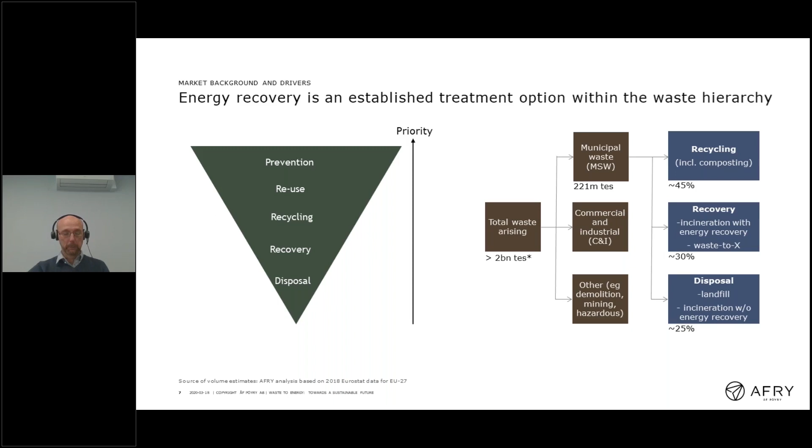A very quick overview of the key policy and legislation that drives waste. The top two directives are to do with what you do with waste and how you move it. And then the bottom two are about essentially how you burn it in waste to energy facilities or in incineration facilities.

So starting at the top left, the landfill directive has been very successful in reducing the amount of waste going to landfill. So the landfill directive is all about definition and regulation and operation of landfill in a safe manner, but it also sets targets for diversion of biodegradable municipal waste away from landfill. These were updated in 2018, and the latest target now is that by 2035, the amount of waste going to landfill should be only 10% of the level that it was in 1995. And that landfill diversion has been the big driver of the growth of waste to energy in Europe.

The Waste Framework Directive on the top right is the document that actually sets out the waste hierarchy we saw on the previous slide. It defines what is a waste, what isn't a waste, how waste should be moved, both within a country and across borders. It also sets recycling targets, and again, these have been updated recently. So the latest target is that by 2035, 65% of household waste should be recycled.

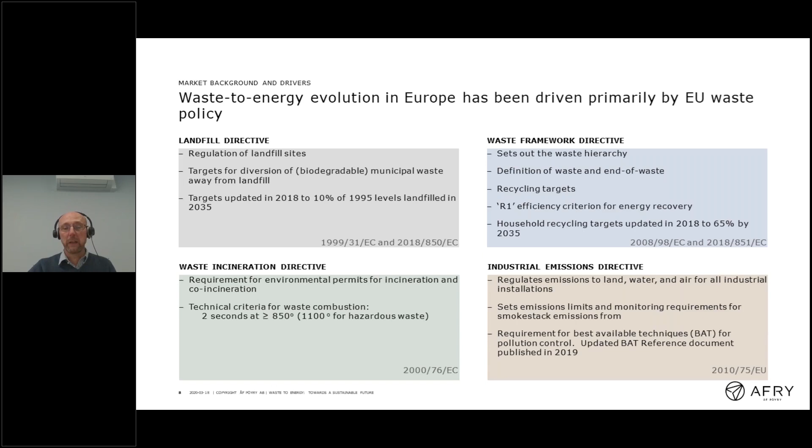Okay, so moving on, the chart on the left shows that although the total volume of municipal waste has remained broadly steady over the last 25 years, the landfill directive has in fact been very successful in diverting that waste away from landfill. And you can see that that diversion has resulted in significant increases in recycling, composting, and in incineration. And so, as I said, the landfill directive has really driven the growth of energy from waste across Europe.

And you can see that on the right-hand chart that shows the evolution of capacity over time. So now we've got over 150 million tonnes per year of waste to energy capacity. And it's worth noting that that figure is higher than the 90 to 100 million tonnes in the chart on the left, because most of these facilities burn a mixture of municipal waste and commercial and industrial waste.

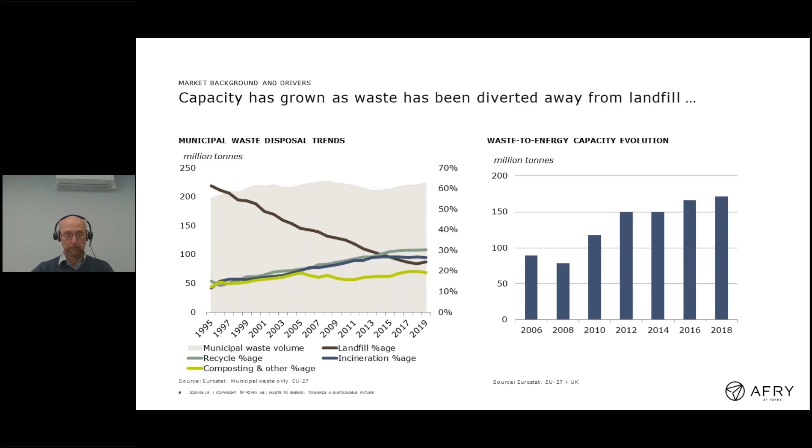But it's worth saying that although, looking at Europe as a whole, it's been a success story, it's certainly a mixed picture across different countries. So as I was saying, generally speaking, waste to energy has made most progress in Northwest Europe. In other parts of Europe, there's still significant amounts being sent to landfill, which shows that in those particular markets, there is potential for more build out.

In the more developed markets, rather than building many new facilities, I think the focus will be on refurbishing and replacing facilities as they age, and some of these facilities are getting quite old in some of these markets.

This is the same chart, but I've also added onto this recycling rates, just to make the point that generally speaking, high recycling and high waste to energy have tended to go hand in hand. As landfill volumes have been diverted away from landfill, that's generally led to more segregation of waste at source, which helps you recycle more, and then the residual waste stream can be sent to a waste to energy facility.

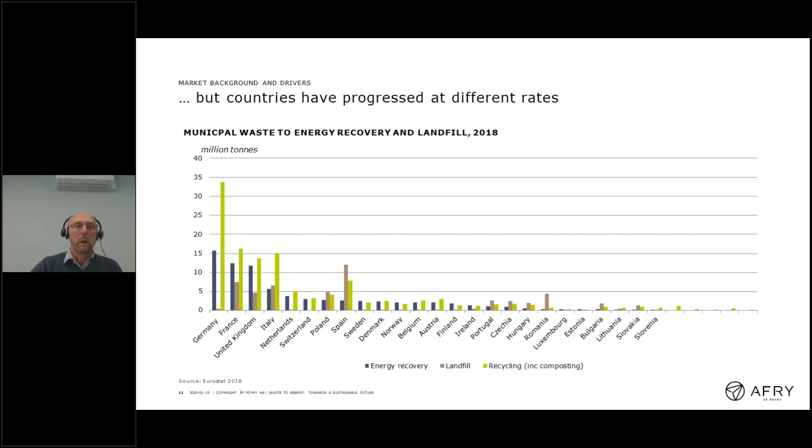but these are very capital intensive assets, and there's definitely a role for third party finance to come in and help get these facilities built. And from an investor point of view, they can be attractive investments. They tend to be long-term investments, and that suits a lot of the infrastructure fund, pension fund money that's looking for long-term investments. And generally speaking, a lot of these facilities are underpinned by long-term waste supply contracts with creditworthy public sector counterparties.

Having said that, there are still a lot of risks that need to be understood for investors looking at investing in waste to energy. In this chart, I've split those into three broad categories: feedstock, technology, and energy offtake.

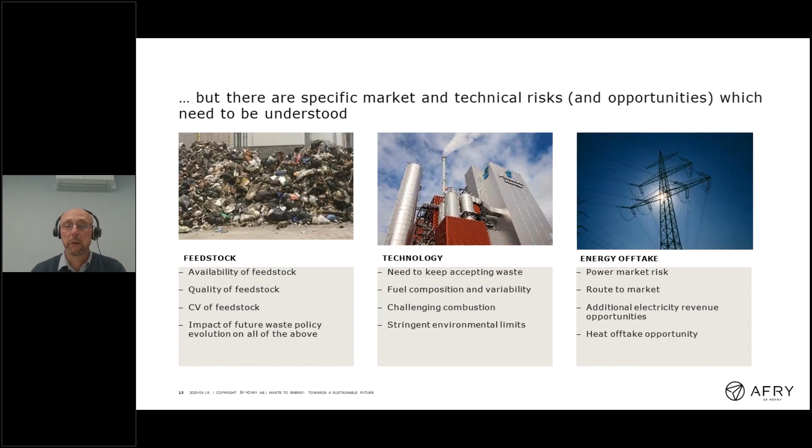And then finally, around half the revenue of the facility will come from selling the energy, with the other half from gate fees from the feedstock. So it's important to understand the power market that you're selling into. How do you actually sell into the power market? What do PPAs look like? Are there additional revenue opportunities available for electricity? So in the UK, for example, that could be capacity market or guarantees of origin or embedded benefits or even private wire supplies. And many of these facilities are also ideally situated to provide heat, either to industrial facilities or to district heating networks. So there's an additional revenue opportunity there.

So that was a quick summary of why waste to energy is an interesting sector for our clients. And with that, I'm going to hand over to Peter, who's going to go into a bit more detail about the technology itself. Very good, thanks. So let's move on to the technological part. And we start to talk a little bit about the basics.

We have many kinds of thermal treatment technologies in the market, but certainly the most common one is the technology based on the grate boiler technology. I would say something like 90% of all the facilities that have been built until now are based on the grate furnace technology, meaning that it has a lot of references. It's really designed for heterogeneous waste, meaning that it has to be a very robust thing. It doesn't necessarily need any kind of pre-treatment, and there are some upsides also, that you can use the metals coming out from the grate, from the slag. You can sort it out and use that.

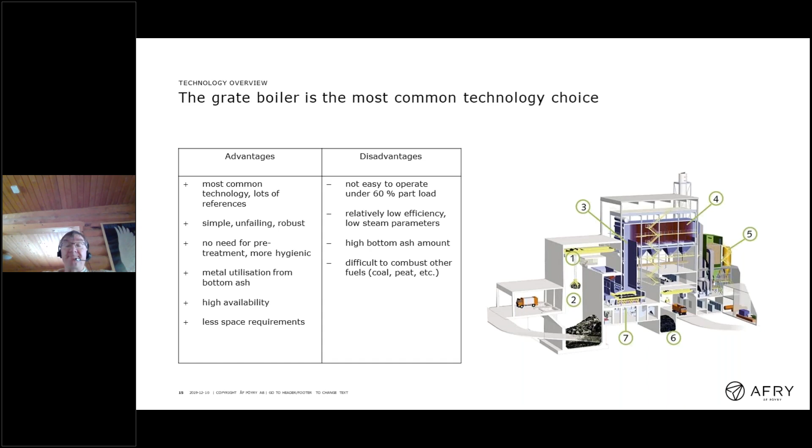But then the downsides are that you operate with relatively low steam parameters, meaning that if you only want to produce electricity, then you have to accept that. In our cases where we have been involved, the highest steam parameters have been something like 450 centigrade, 76 bars, and if you want to go even higher, then you need some special materials for that. Then because of the rather heterogeneous material, they have a high slag amount coming out from the grate, and this is definitely not a multi-fuel boiler, so it's difficult to co-incinerate conventional fuels like coal, peat, etc. But we can move on to the next slide.

Other technologies, so the second alternative technology to the grate is based on fluidized bed combustion. Something like 5% of the facilities that are built until now are based on this technology. And the benefit with this is that if you have a circulating fluidized bed boiler, you can reach higher steam parameters compared to a grate furnace. So in our cases, it has been something like 500 degrees and 85 bars coming out from the boiler.

If you have a bubbling fluidized bed, then the steam parameters are rather comparable to a grate furnace. We are talking about 420 and 40 bars. The good burnout of ash is one upside of this technology, and this is really a boiler for multi-fuel cases where you can co-incinerate coal, peat, wood and sludge.

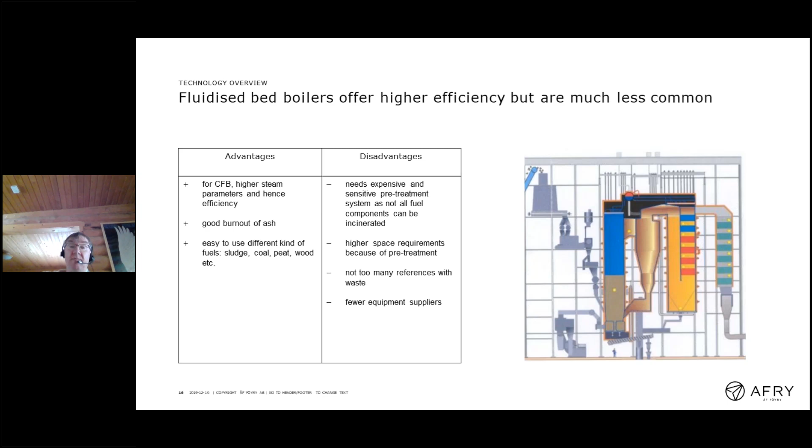But the downside is that you need an expensive and sensitive pretreatment. You need more space for that, and the availability figures are not as good as you have had in the case of a grate boiler furnace. We can move on, and then there is the third one which I wanted to take out. We actually have references of all these various kinds of technologies.

This is the gasification. This is an example of a true gasification plant, meaning that we are gasifying the waste and producing gas, which we then burn in a gas boiler. And there you can really reach high steam parameters. In this case, 540 centigrade and 120 bars, and this makes the investment competitive if you already have an existing gas boiler there.

The downside is that, as in the earlier case, you need an expensive and sensitive pretreatment, and this cleaning of the product gas is not yet a commercial technology in the sense that you could only use municipal solid waste as a fuel. You have to combine or operate the plant periodically with cleaner fuels in order to clean up the hot gas purification. And in the market, we have a limited number of references and suppliers.

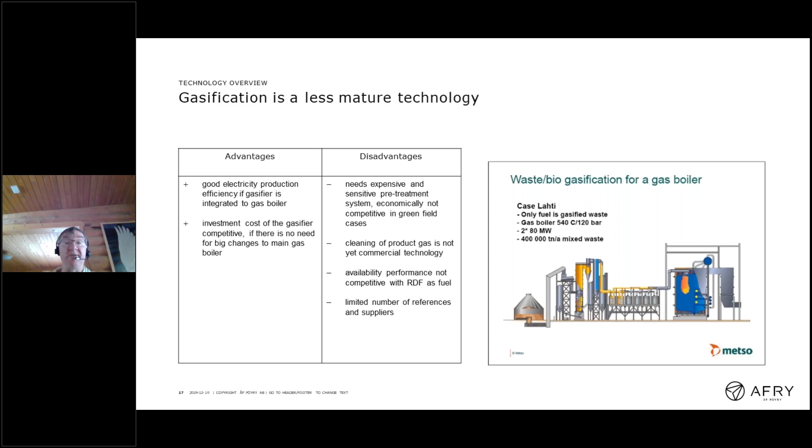And the next slide shows you one of the cases where we are treating the municipal solid waste with this multi-stage pretreatment plant. This is necessary because the material piece sizes have to be suitable for the fluidized bed, and also you have to take out components like magnetic and non-magnetic metals, glass and stones from the waste in order to have a trouble-free operation of the plant.

What I wanted to highlight here is that the purification of the flue gases is the other challenge we are confronting, but for all these three technologies I just went through, we have the same challenges, and we have good technologies in the market that can match these requirements, cleaning the dust, acid gases, toxics, nitrogen oxides, and heavy metals. And there has been a huge development in the market from the earlier stages, where the flue gas purification was as big as the rest of the plant, to more simple and feasible solutions.

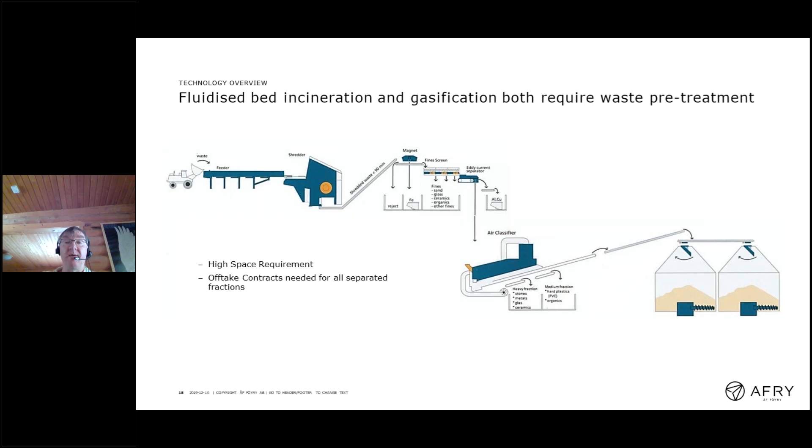Then I think, Helen, you will continue. Yes, thanks, Peter. So as Peter has introduced the main technology for the core of the energy from waste plant, the combustion element and the boiler element, we just wanted to talk about a few points to consider around the rest of the energy from waste plant.

So critically, energy from waste plants are really long-lived assets. They have a plant life of between 25 and up to 40 years. And over that time, there might be variations in the waste quality and quantity, so you might have varying calorific value, moisture content, and ash content. So you really want a robust energy from waste plant so that it can adapt to any future changes.

We've seen over the recent period, especially in the UK, that a number of energy from waste plants are applying to increase their capacity on their permits to allow them to process more waste throughout the year. This means that they're either operating above 100% for the majority of the year, so they've got a very good, reliable plant, or their availability is higher than expected, or perhaps they're taking lower calorific value waste so that they can process more. So you really want to have a robust plant to be able to support that sort of increase.

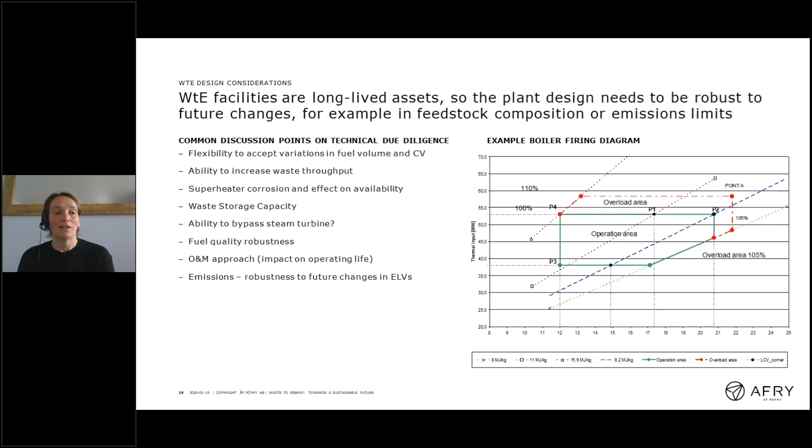So how do we avoid them? It's really about setting up your contract and your project in the best way possible to minimise those risks by considering what's the best contracting model. So traditionally in the UK, we've used EPC type contracts where you just hand the construction of the whole plant to one contractor, and all the risk goes to that contractor. But then we've seen that they could go out of business, and that's left significant issues for the client.

So an alternative strategy is an EPCM model where the plant is broken up into its major components. So you would let contracts for the main combustion technology to one contractor, the steam turbine technology to another contractor, the civils work to another, and the balance of plant to maybe one or several. And if you're going to go that way, you obviously need somebody to integrate those contracts and make sure that you have a successful plant at the end of it.

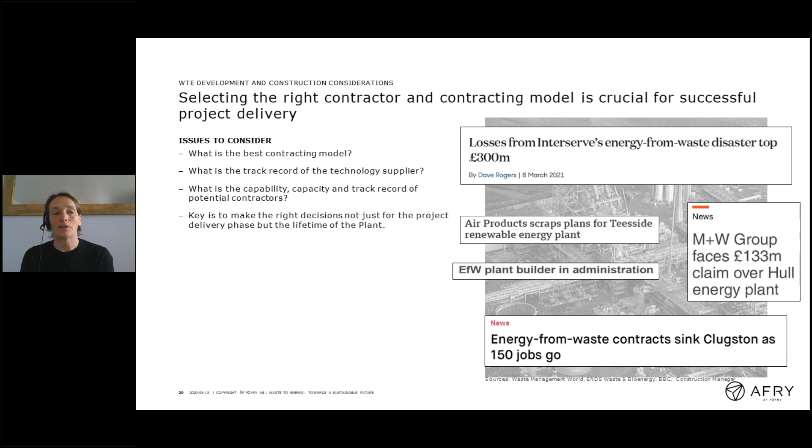So finally, it's been a very quick run through of what is a really big industry. But from my point of view, I think the key to a successful project and a successful plant is really making the right decisions in the project implementation, not just for the delivery phase, because that's only 3 to 5 years, but for the whole lifetime of the plant, so the 40-year lifetime. So you really want a good proven technology and a robust plant that can adapt to the changes that you might have in the future. Okay, thank you.

Lovely, thank you very much, everyone. So we're going to move on to some questions. I think we've got quite a lot of interesting ones that have come in. So let me just ask the first one if I can. So I've got some suggested options. Right, yeah, here.

Ali, maybe you could answer this one. If recycling rates continue to improve, will there be enough residual waste for existing facilities? Okay, yeah, that's a good question. And the answer is not necessarily. It's important, I think, for any facility to understand, for that particular facility, what's the outlook for the supply and demand of residual waste in its locality. And so typically you would look at a local or regional level, although you do need to consider movements of waste further afield, exports, etc.

So the supply of residual waste is driven by factors such as what's happening to recycling rates. The demand for waste is about what are the competing disposal routes for that waste. So obviously there's landfill. What are the other waste to energy facilities in your region that might be looking to use that waste? And I think over time we might see the emergence of more alternative uses for waste as well. There's growing interest in waste to X technologies, and that's converting waste to things like transport fuels, road fuels, or aircraft fuels. And I think over time that will become more significant.